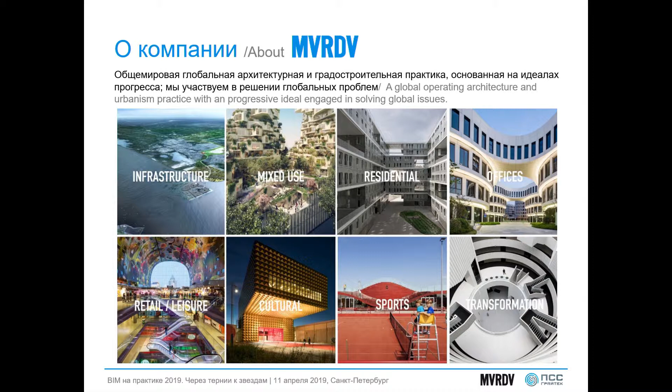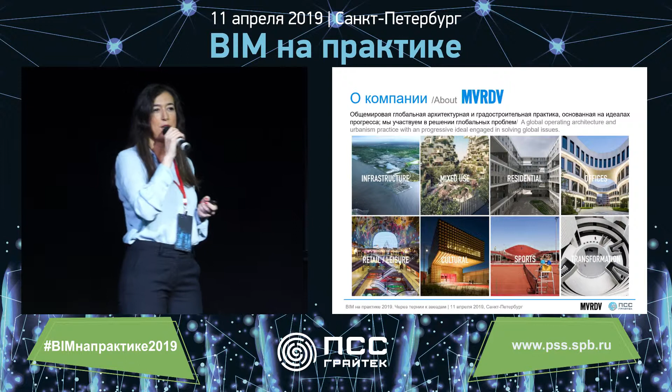About MVRDV, we are a global and operating architecture and urbanism office. We work across infrastructure, mixed use, residential, offices, retail, leisure, sports, cultural programs, and transformation. We are really engaged in solving these global issues.

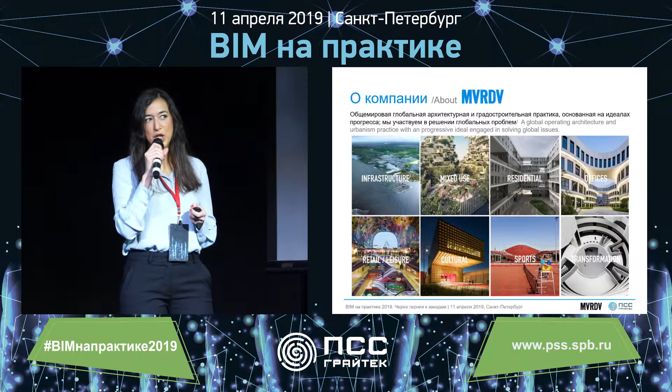So let's start with the Valley. Here we have a project that is mixed use - residential, cultural, bar and restaurant - 70,000 square meters of program. We started it in 2015 when we won the competition.

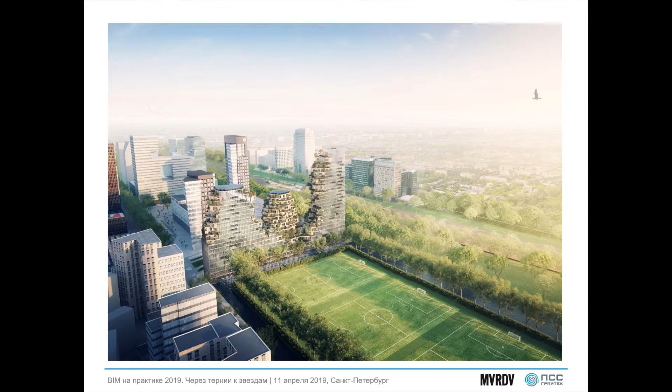We are in the cultural district center of Amsterdam. If you can see here, we have a full area of working, and a full area of housing and activities. So our building is the intermediate between these two different programs.

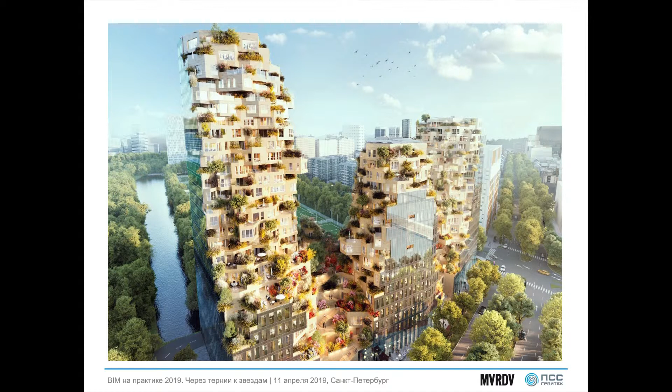What we designed was a more urban facade that surrounds and reflects the more business area, while giving a human scale in the interior with all the diversity and the terraces.

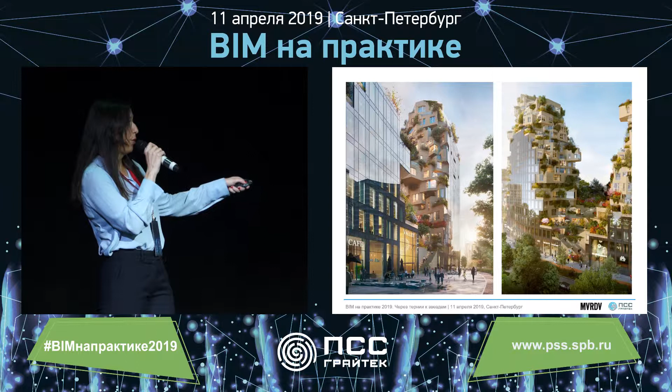Here you can see we created a really active plinth with different programs - retail, cultural - and that's the reason we call it the Valley: we created a plinth that spreads out through the different towers, giving access to the different terraced valley.

In the next picture, you can see that outside, as I said, we were reflecting the surroundings, the urban and business context, but inside, the valley is about green. The valley is about gardens, and the valley is about human scale.

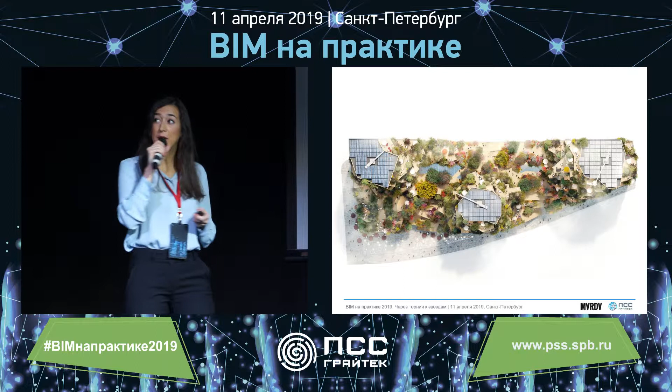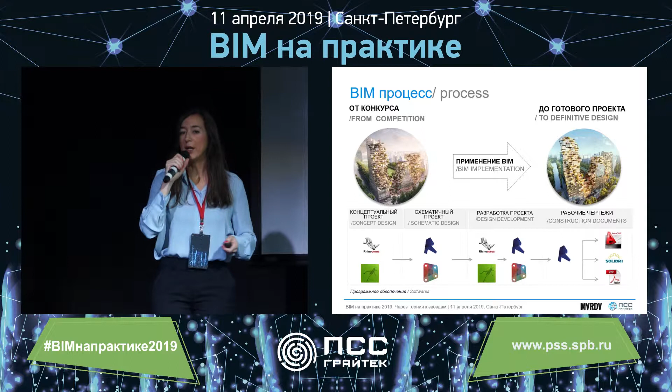Not many people really trusted that we could realize this project, or how we could do it. So actually, the result and the solution was to implement it in BIM, because we had to rationalize it - we had to take into account all the inputs from all the different parties and stakeholders.

Here I'm just showing you how this was our design for the competition, and how after the BIM implementation we had the definitive design. For the processes...

Unfortunately, I have to say we prefer to work in closed BIM. We prefer to have an easy workflow, and to use the same type of software. But many times, for different reasons, we have to deal with different kinds of software. Back in 2015, we started the model and design in Rhino, and we were scripting many things in Grasshopper.

So we also have to find a way to make a good workflow to implement it in BIM. That was the time of our schematic design.

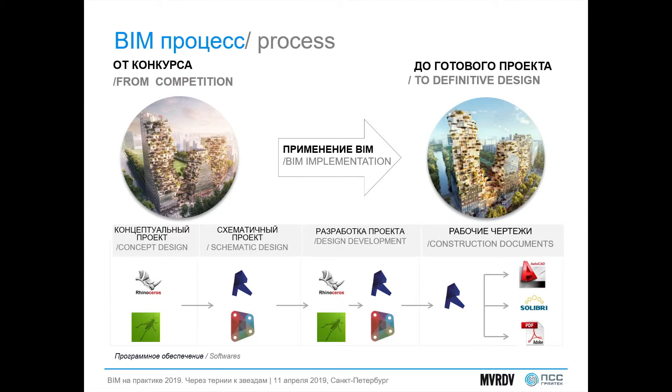Then we were implementing many of the tools with Dynamo. In the design development, we had to struggle with the facade, so we came back to Rhino and

the Grasshopper script to solve it. And for the construction documents, after implementing all the inputs in Revit, we developed it in CAD drawings,

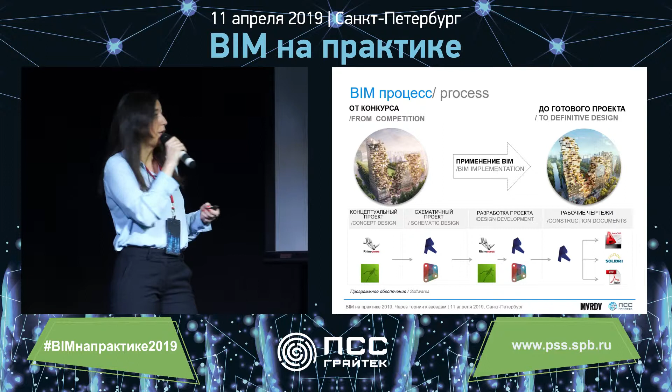we check the clash detections in Solibri, and we submit the PDF drawings. So here, I will just explain this datascape, this parametric design that we like to have in MVRDV, and how the MVRDV method works.

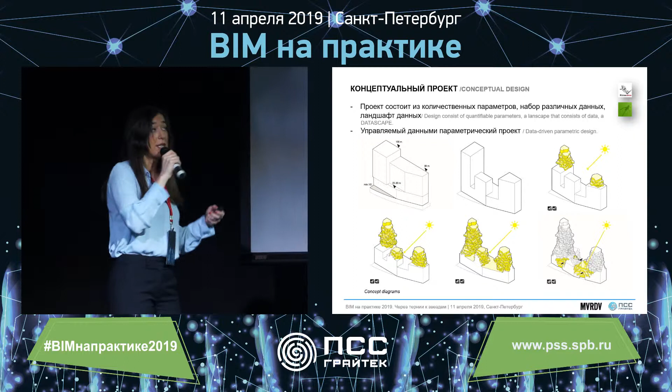For MVRDV, BIM is like the next step. We started always with the envelope that was provided by the municipality. It was a really weird shape, but at the end, the program led to a plinth with 3 different towers

of mixed use. We took into account all these inputs, how we bring human scale, how we bring all the inputs about the sun, about the views, about the terraces. So we started to carve out the towers, all the 3 towers, even the plinth.

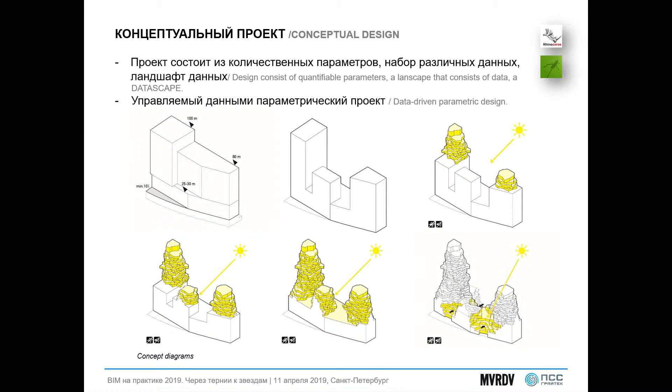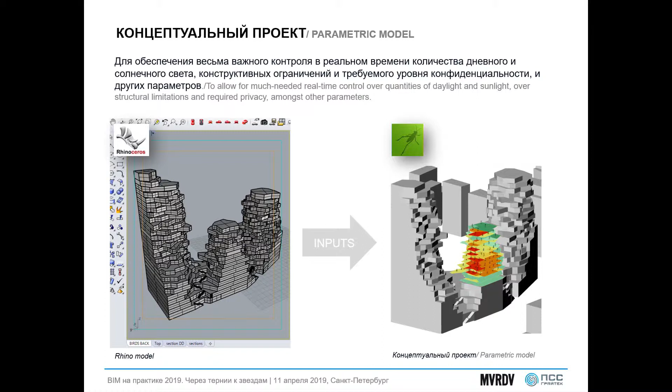So here, as you can see, we had the Rhino model. We started with the competition, and then in collaboration with Arup, we developed a parametric model that could show all the different inputs that we wanted to integrate.

So we could control how many sun hours we would have in the model. We can slide and set up the inputs we wanted.

We can control also the solar load we wanted in the project, how many terraces we wanted for the different buildings, which will be the view and privacy range, which will be the structural limits and constraints we have to take into account in the design, or which will be the types of apartments.

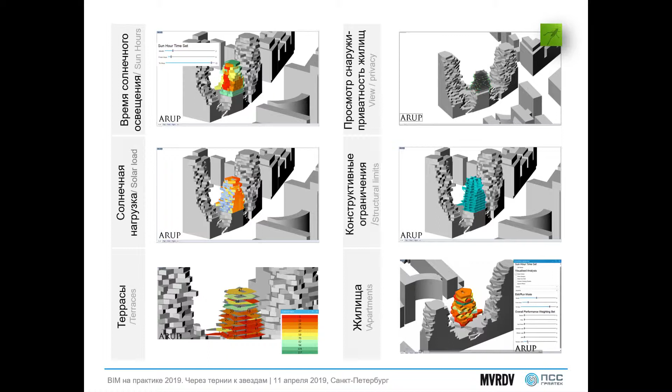So what happened to us then is we ended up with an endless number of different design options. But we had the tool and we had all the parameters integrated there.

So we can meet the different stakeholders, we can see which are the different interests, and we can really prioritize which are the inputs that should be the ones that define the design.

So at the end, we really wanted different typologies, for the diversity, but really keeping good terraces, good views, and really good sun hours for the apartments.

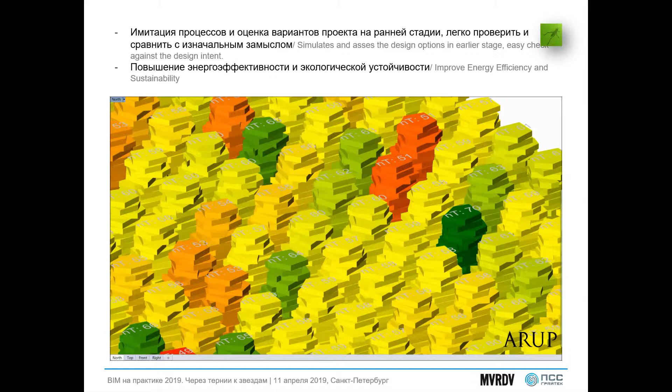So here I would like to show you how we split the model and how we collaborated. At that time we were working on a Revit server, since Autodesk, about 2 years ago, stopped giving support to that model.

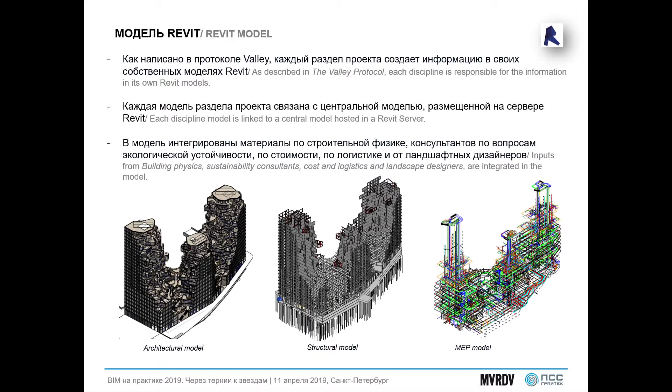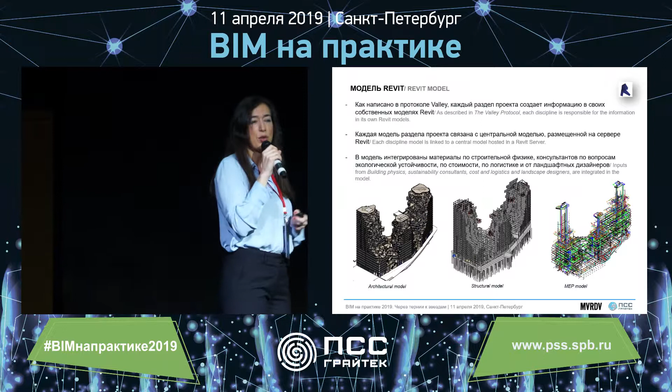I will show you in the next project how we moved to BIM 360. But here, what we did was have the architectural model, the structural model, and the MEP model. And all the building physics and sustainability inputs were integrated in the model.

When a model is difficult to handle, you might know that we also had to split it into rational, different parts. So what we did was divide the architectural model at the same time into the tower north model, the west model, south model, the facade, the different cores, and the plinth.

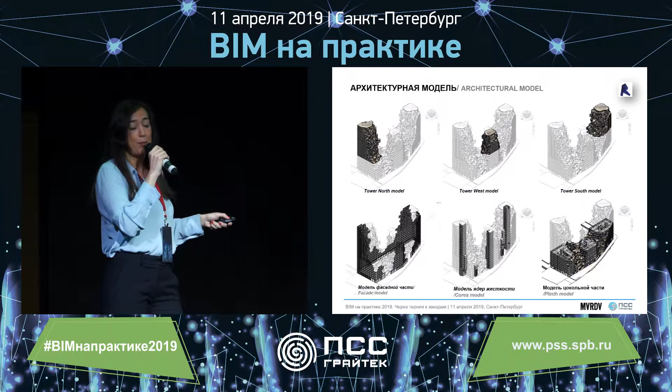That was really useful. We could control how many apartments we have, how many square meters all the different apartments have, and this was possible with all the scheduling and control done by the Revit model.

And here I just wanted to show you, as I saw one of the other speakers mention, this was actually a decision from the client. So we went for Solibri model checker.

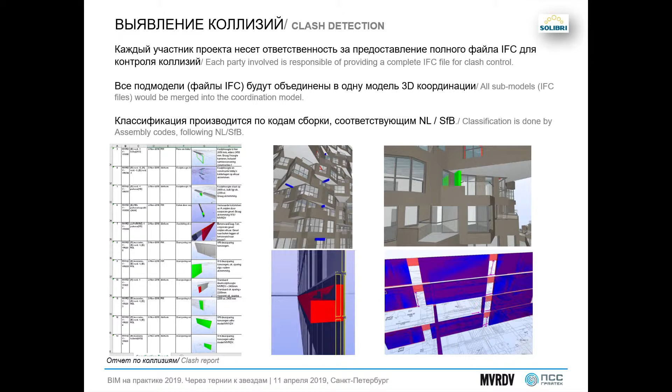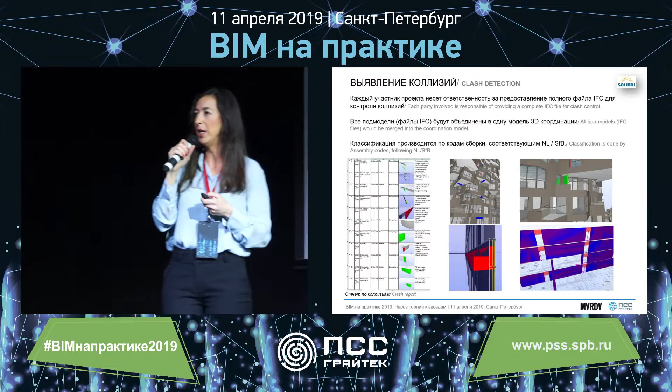Actually, as I said before, we really like to have this closed BIM. We try to have Navisworks for our clash detection, but here, as I said, it was a client decision, and then each party involved was responsible to submit the IFC model to make the clash detection.

Here, as I told you before, we were struggling with the facade. You have seen how diverse is the interior facade that we create to give this human scale. So we also have to deal with how this is going to be manufactured, how many different pieces of natural stone we have to create. We have to find a way to optimize, rationalize, and analyze which will be the different sizes of pieces. So here, what I'm showing you is the different process we follow.

First, from the Revit model, we locate all the tiles and extract it from the BIM model. We move it and analyze in Rhino, and we create a script we call the facade generator, that helps us rationalize and analyze with the different requirements we have from the manufacturer and the construction. Later, with a Dynamo script, we move it back to Revit, and then we create a family that was assigned to solve the issue of the facade.

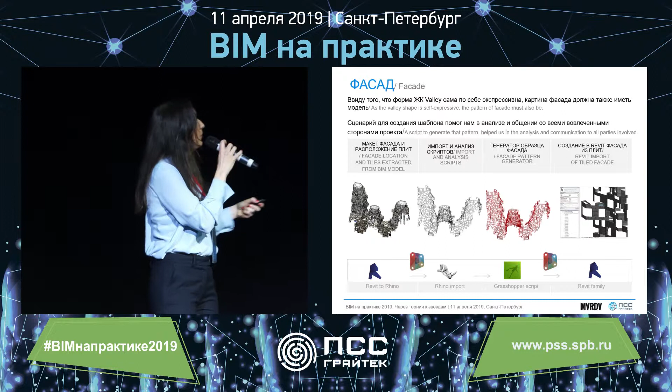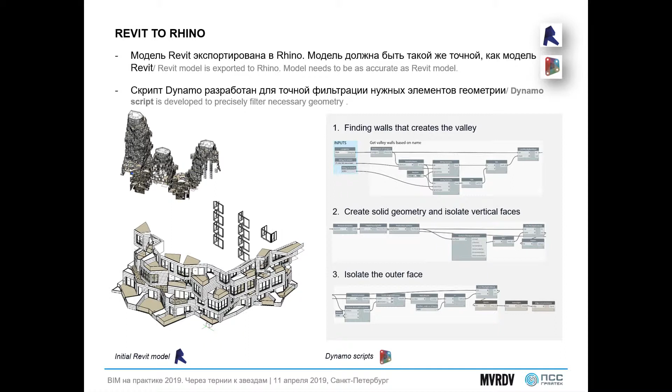Here in more detail, I'm showing you the different steps. First, as I explained, we move from Revit to Rhino. The Revit model is exported to Rhino and has to be as accurate as possible. For that, first we find all the walls that create the valley through a Dynamo script. Then we define and create the solid geometry, and we isolate the vertical faces, and we also isolate the outer face.

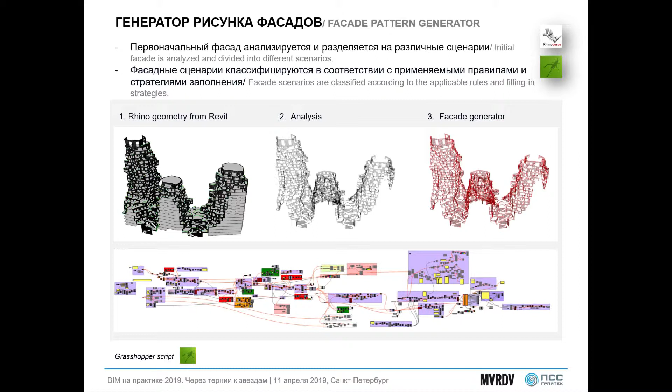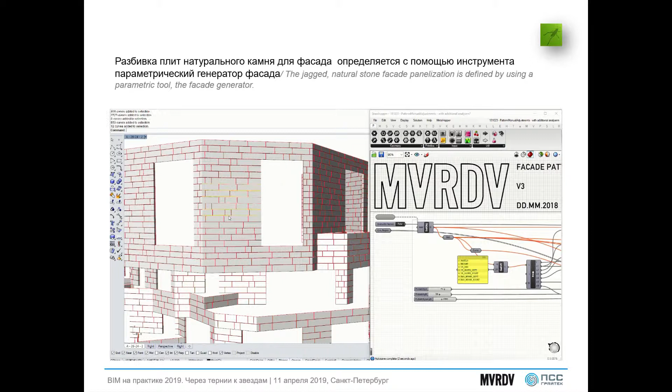When we bring it back to the facade pattern generation in Grasshopper, we took the Rhino geometry from Revit, analyzed it, and built it up. Let me show you with this facade generator: we have all the lines of the tiling of the facade, all the panelization. So we could really control all the inquiries from the construction side, and choose how the different panelization will be, and how it could really be optimized and rationalized.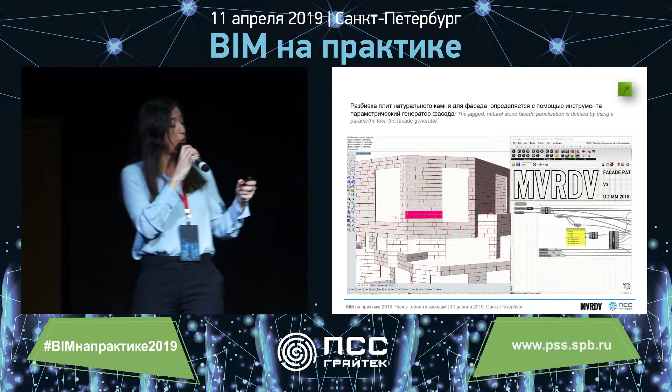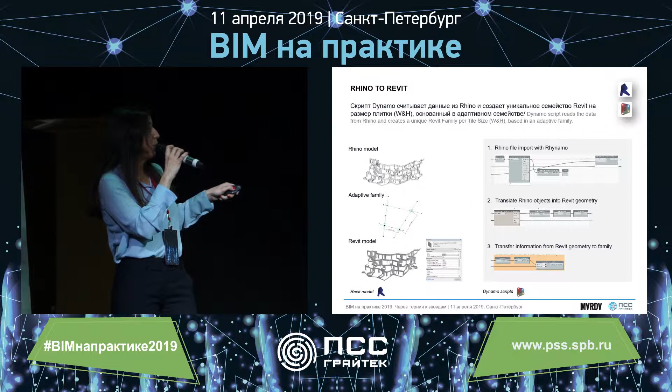After we made the proper choice, after discussion with the constructor as I mentioned before, we could bring all this information back to Revit. From this Rhino model, we created a unique Revit family per tile size based on an adaptive family, which translates all these Rhino objects into Revit geometry and transfers this information from the Revit geometry to the family.

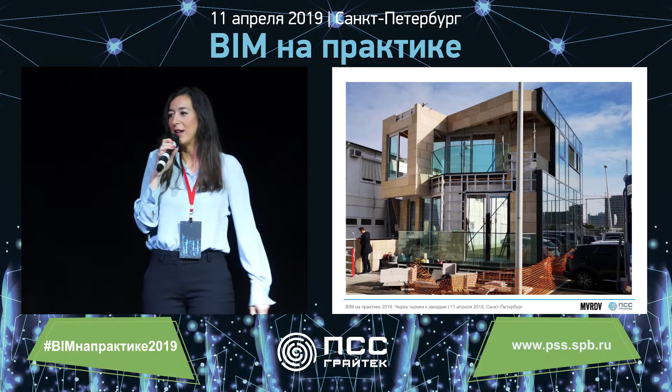Here is one of the examples, and actually this is the current mock-up of the facade. Here we control all the different types of sizes. We started at the beginning, at the competition design, with something like 900 different types of sizes. That was under control but difficult to realize and also not cost efficient.

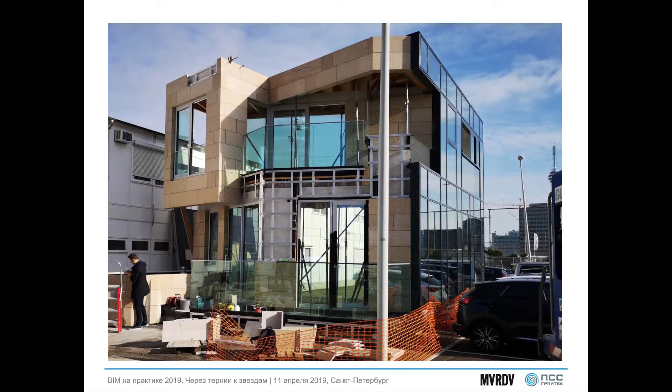So now, as I said before, we are really excited. Our first building project, which we will have in Russia, we call it RED7. It's 52,000 square meters of retail and residential. We won the competition in 2017. We hope we'll bring a new value to the city center of Moscow.

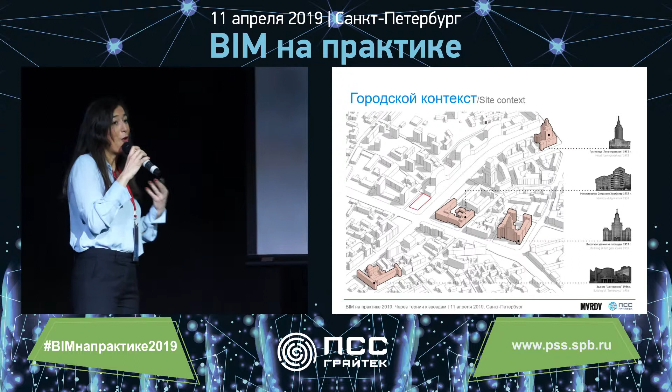Here we are in a really fantastic location. We have great views of the different monuments and buildings of the city center of Moscow. We will go up 78 meters high, and we hope we can offer and add value to the area.

As I explained before, that's the methodology of MVRDV: we take into account and consider all the constraints and inputs, and apply them into the design. First we get the program from the brief, which was commercial, shared facilities, and residential. One of our main actions was to create the main entrances for the different programs. Then we also stretched it to create views in the upper part, so the top apartments will have really fantastic views to the surroundings of the neighborhood.

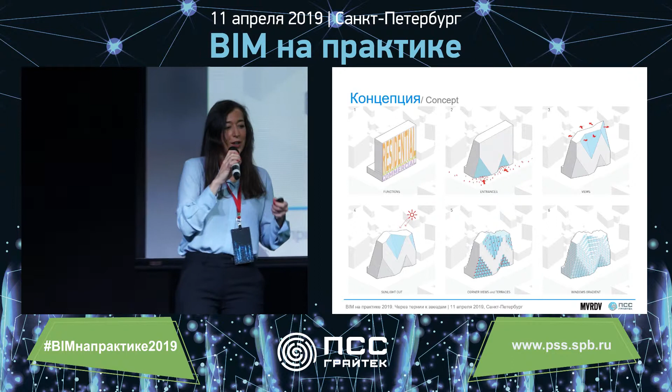Then we also consider inputs like the sunlight, and we need to modify the volume and adjust it accordingly. We also take into account the quality of the different apartments, and how to create these corner views and terraces. We wanted to bring this window gradient that you can already see in our skyline concept. Our inspiration was the classical silhouettes you can find across the city center of Moscow, and the idea is respecting and enhancing the beauty of this historic context.

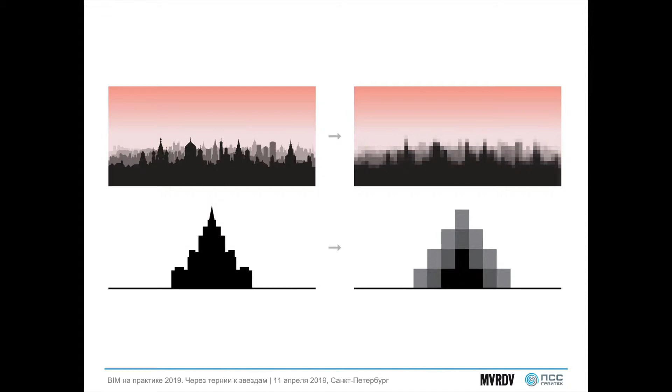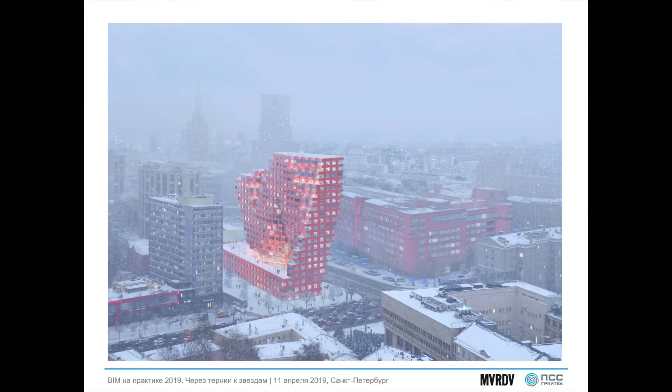And here is another view. You can see we have this gradient of windows that I will explain in more detail later.

They also are in charge of the MEP, the structure, and also the fire issues. For the retail, we had a Dutch company involved about all the issues we have to solve for this program. That was Cushman and Wakefield.

Well, what I wanted to show you, because actually in the previous project we were working with the Revit server. Many times we try to be the ones hosting the model, but as architects, many parties are always dealing with constraints about VPN connections, especially when you are a global firm working with different countries, and also legal and security issues.

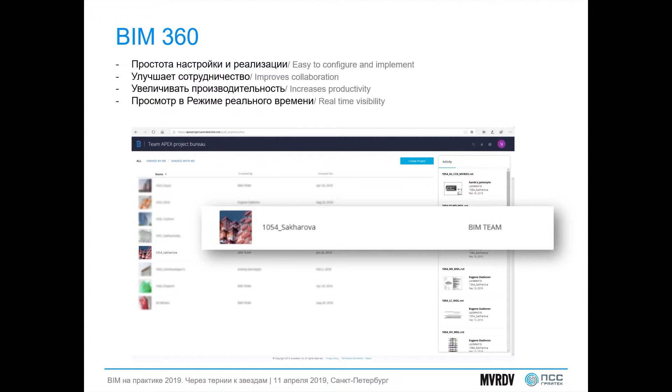So that was the time for us to move to the cloud, to work online and try to stop struggling with these kinds of issues.

So this is one of the best examples we have right now. It was easy to configure and implement for us. It was easy to collaborate with Apex in real time. That really improved our collaboration.

Here I'm just showing that we could also control the access: which users would really be in the project, which team members would be involved, and who could really see all the information.

And then all the data was shared for all the team members that were in the project, and we could really upload and download the data anytime.

Well, this is gone with 2019. I don't know if there's any Autodesk partner here, but we love the communicator. We love having this real-time chat with all the parties of the team. This is one of the examples.

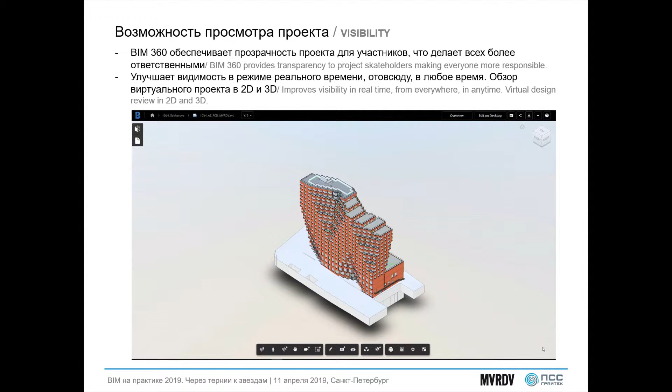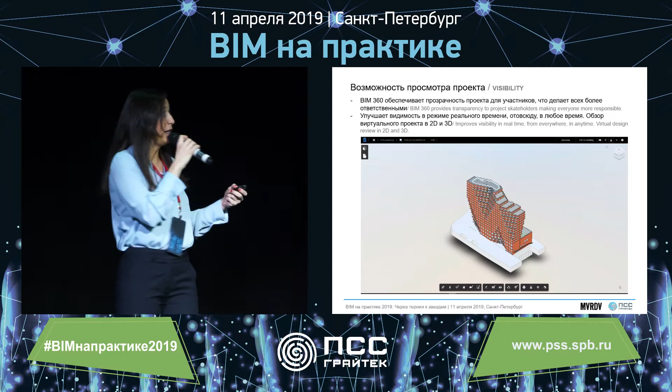And then about the visibility, many times we can just grab one of our main directors, one of the partners, just show them the model, and try to make decisions at the same time. We can also share it with the client anytime with other different parties.

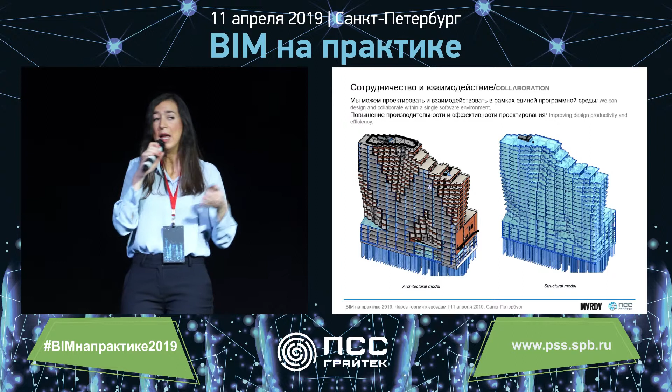And here, I just wanted to show you we still keep the same way of organizing. So we have the architectural model, we have the structural model. At the end, we have a protocol we have to follow, with roles and different responsibilities that have to be taken into account.

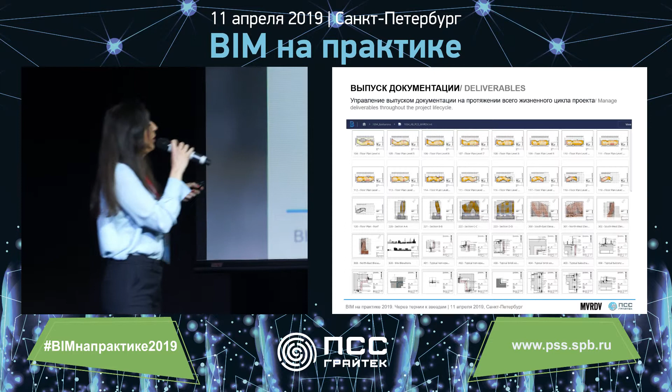Here was the architectural model and the MEP. These are different parts and all the deliverables that we can already see in the platform. The data, as I said before, is really easy to access for all the project data.

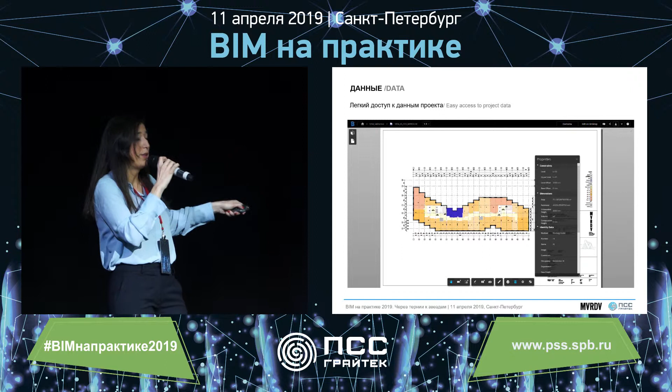I think here I just wanted to show we can just select one of the rooms and we get directly all the data and all the information about this room. All the details can be easily accessed through BIM 360 and shown to the different parties.

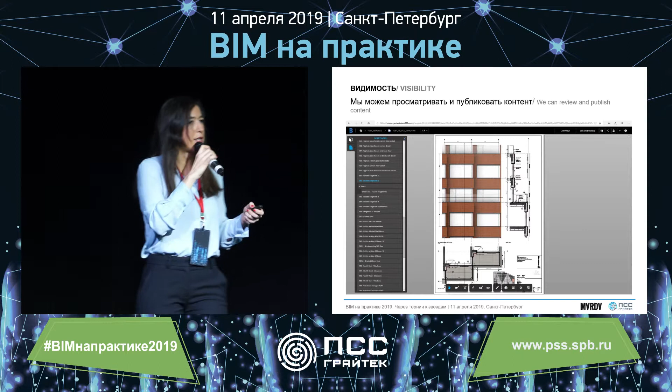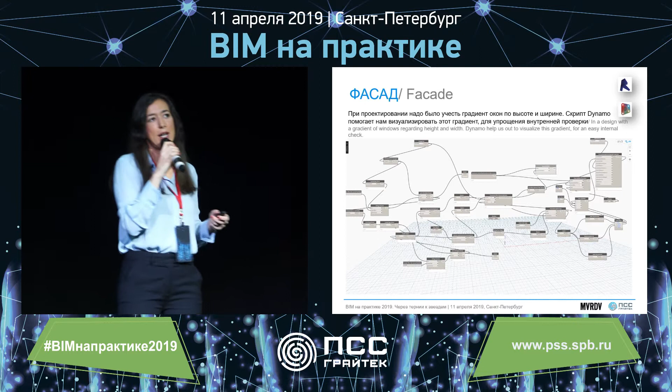And then about the facade, that time we really moved again to Dynamo. What we were really checking was scripting to help us control all this gradient we had in the facade with the different windows, and that helped us later show to all the parties how we wanted to organize, how many types of windows we would have, and how we would control this gradient.